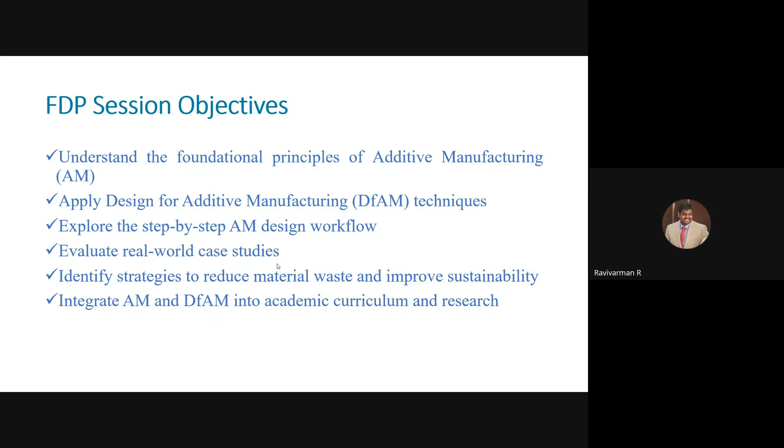Integrating this AM with new design factors, identifying the strategies to reduce material waste and improve sustainability, and integrate additive manufacturing with the design into academic curricula and research. What is the current state now?

As you all have been seeing this topic for the last 4 days, I'm just touching it and then going into the topic. Additive manufacturing, as we know, is the process of creating a three-dimensional part by adding material layer by layer, directly from a digital model.

So in the conventional process, what we do is subtract materials, like milling in the lathe operation or drilling, whereas in additive manufacturing, this material waste has been minimized. So with less resource, we are trying to develop the same materials, which enables us to work with complex geometries and supports the demand for decentralized production.

The major advantage is it helps us achieve quicker production states, with reduced tooling cost and other benefits. So as a comparative thing between additive versus subtractive manufacturing -

in the process flow chart, A and B, we have a solid material, and we subtract the material according to our requirement to bring the required object. The waste generated, the amount or percentage of waste generated, is high in a subtractive manufacturing process. Whereas in additive manufacturing process, the material waste generated is very less, because we are adding layers according to our requirement and the design shape.

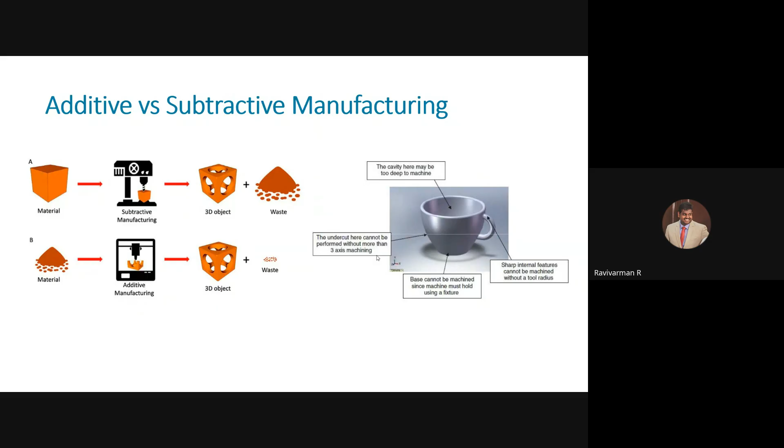So this has to be reduced. Our objective as engineers is always to work towards a better environment with newer processes and technologies. All these processes require special machines, which generate these models stage by stage.

So the process of additive manufacturing, step by step: first we create the design. How we create the design is very important. We can make it as a solid model, and then we provide ribs or extra provisions or support to that model, so that when this file, the CAD file, is given as input to the additive manufacturing process, it is given in the STL file format.

We have to make sure that the design we use helps us reduce material while having proper strength and integrity. Because if we create a solid material without optimal use of material, we end up wasting material, building solid materials that require more material and take more manufacturing time.

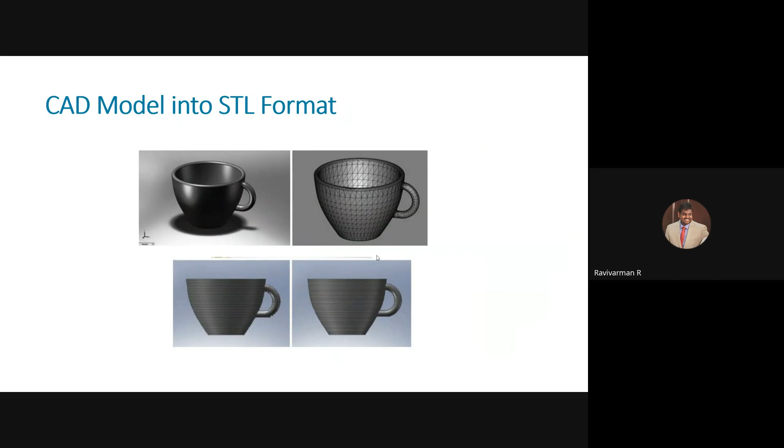So this is a common, simple example shown here so you can relate to it, showing how this CAD model is converted into STL format. You see all these triangular shaped nodes we can develop, and the model is sliced by layer and developed.

Here is a small video about how additive manufacturing works. In the STL format, a triangulated representation of the 3D model is created. This model helps you.

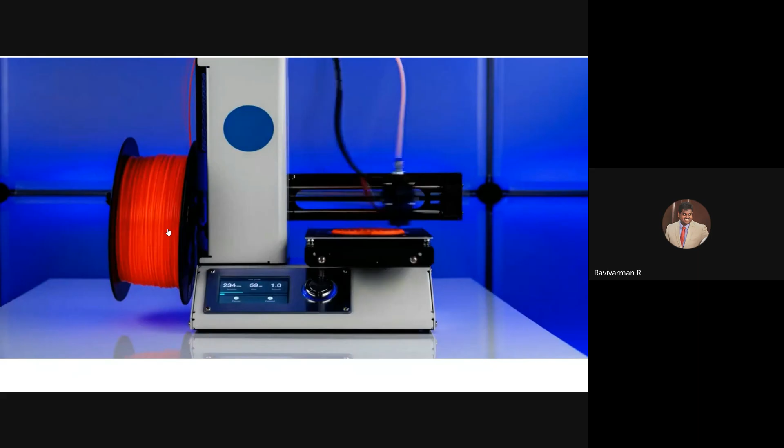The slice parameter, layer, what is the density? After that it is printed. So what is the methodology we use for printing it? We rely on that.

Various materials we can use, like now we have metal additives, and this is being used for implants also.

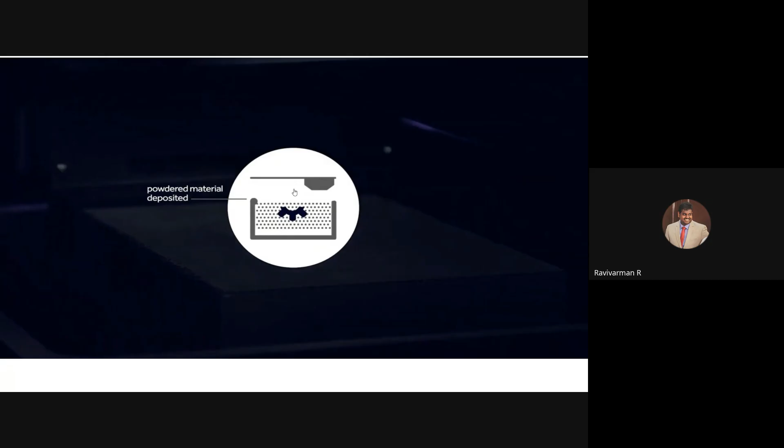Here you can see different operations of how powder material is being deposited. After that, this deposited material is printed using some binders in it, and then the platform is lowered, so that the product is built up stage by stage.

The major advantages here are high productivity. Production is getting increased majorly by reducing material waste and saving energy.

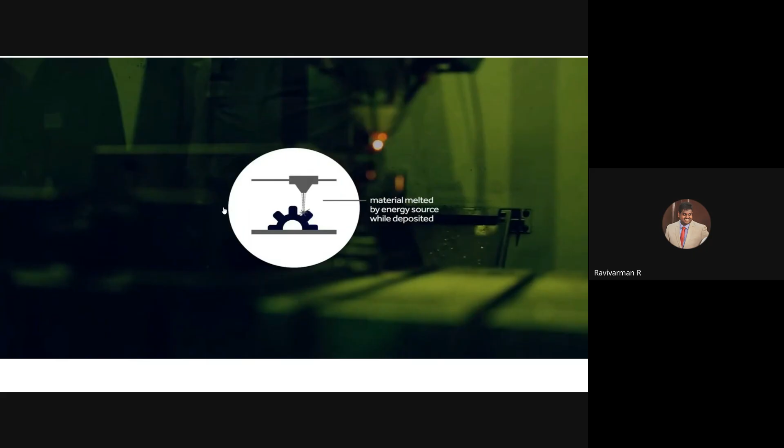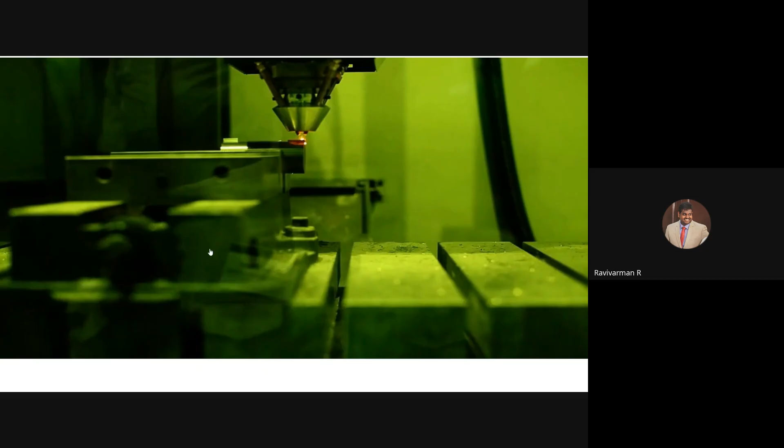This is a picturized view showing a gear, how it is developed using the AM methodology, additive manufacturing methodology. We have lots of types in that; one such type is the material extrusion process.

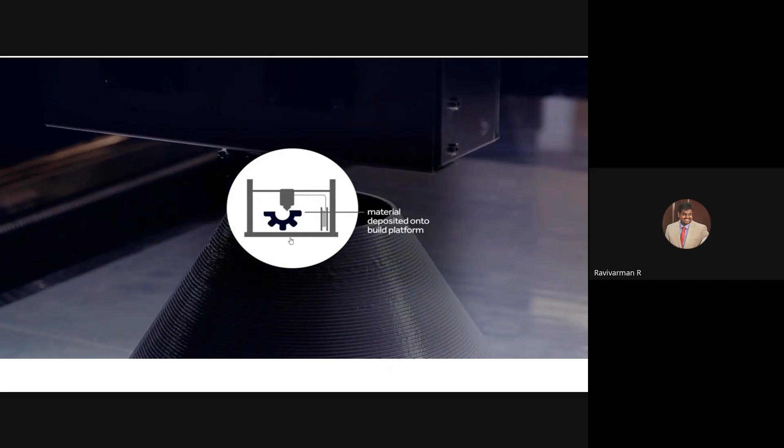So the feedstock can be inexpensive, reduced one.

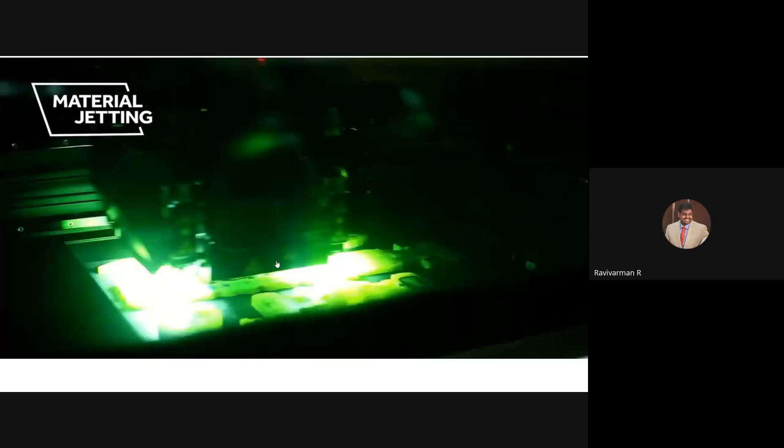Seeing this methodology, why is additive manufacturing becoming important in day-to-day manufacturing processes? Because they are more cost effective, so we have the flexibility in meeting market demands. Nowadays there is a requirement for new products with fewer manufacturing methodologies. So we try to retrieve the shapes and manufacture them more reliably, with a better aesthetic look.

So you can see that additive manufacturing is coming into every field nowadays, from aerospace to human bodies and implants. We can develop a customized product specific to a person, with better sustainability goals and waste reduction, more aligned towards climatic changes, government schemes, and other things.

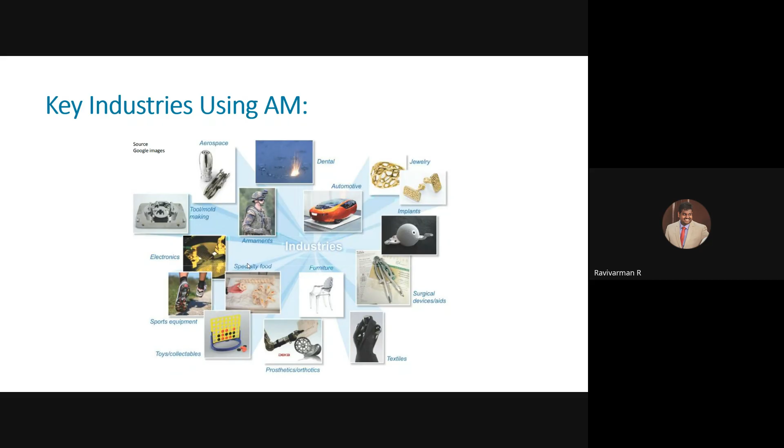So in day-to-day fields like implants, textiles, automotives, and different sectors, we are trying to utilize additive manufacturing, which has been growing largely. The percentage of involvement in producing additive manufactured materials has grown drastically in recent years.

So why additive manufacturing? As we are aware, this is creating a huge impact in the manufacturing process nowadays. How does design play a major role in predicting the performance of additive manufactured products?

In traditional manufacturing, we must consider tool access - how we can utilize the tools used in machining so that the tool can travel into the machining pathways, or in a casting process, how the mold parting lines are differentiated, where we must consider the mold, runner, riser, and all specifications. So we have limited usage of cutter tools and cannot go for different materials.

Then there are casting gates and die constraints, so we cannot produce a component as per our own requirement.

But now, due to design and additive manufacturing, we can develop complex internal structures like lattice structures and honeycomb structures internally, which provide better strength, enable good geometries, and allow customization of material weight. Then there's part consolidation of multiple parts, so we no longer need to redesign again and again.

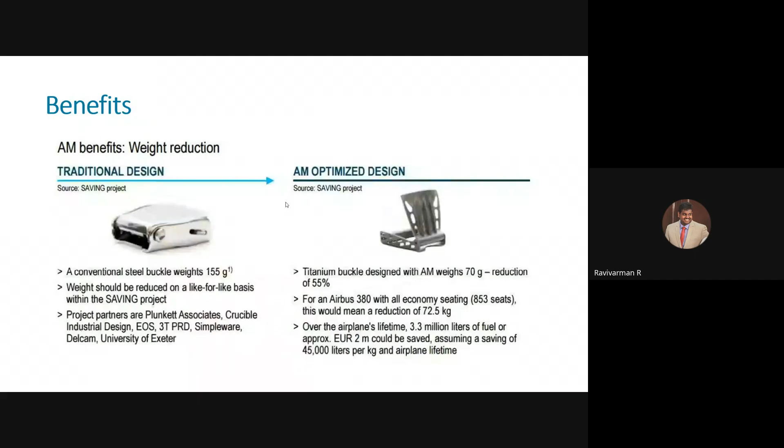So here there are some additional benefits also, like the complexities are very less. This additive manufacturing enables the manufacturing of new geometric shapes that are not possible with conventional methods. With direct conventional methods, you have to take into account the tool making cost - how much I want to rely on making tools. Additive manufacturing makes it possible to design, for example, cooling channels, so that it cools the tool components better. Therefore, we get a reduced cycle time.

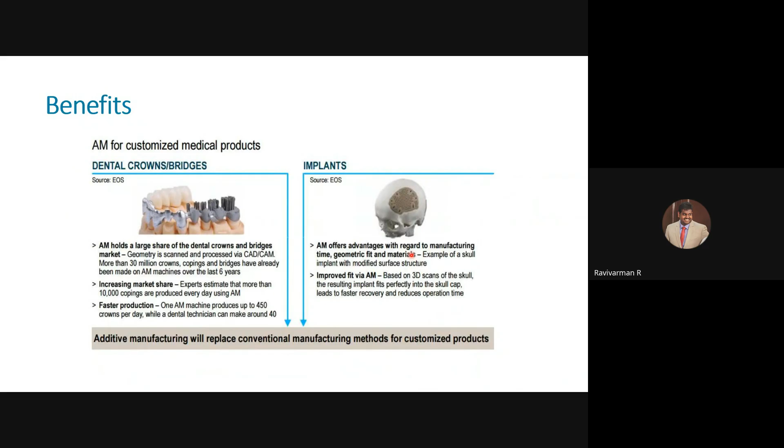So the major benefits of this additive manufacturing for customized medical products - which has been used for a long time in dental implants. We see also large shares in dental crowns and bridges markets, where the geometry is scanned and then processed through CAD CAM software. So we can create the exact requirement of the shape, thereby the market share has been increasing in fast production. This also provides advantages with regard to manufacturing time, geometry, fit, and materials, where skull implants - a particular implant for a particular human - has to be created. So this additive manufacturing plays a vital role.

So in future, if we are planning ahead, now we have been provided with normal printers - how printers have been used. Like that, in future we may be having a home 3D printer, where we develop our requirements on a need basis.

Accordingly we can recycle the old material, so that we can improve and input our personalized data, so that we can create it. Nowadays you can see that cell phone covers also have personalized things printed on them, so this has been developed.

Now we come into the design for additive manufacturing. This is very important to take into consideration before you process or develop the product, such as topology optimization, lattice structuring, part consolidation to improve function, reduce material usage, and minimize supports during the process. All this has to be applied during the design for that particular component produced through additive manufacturing.

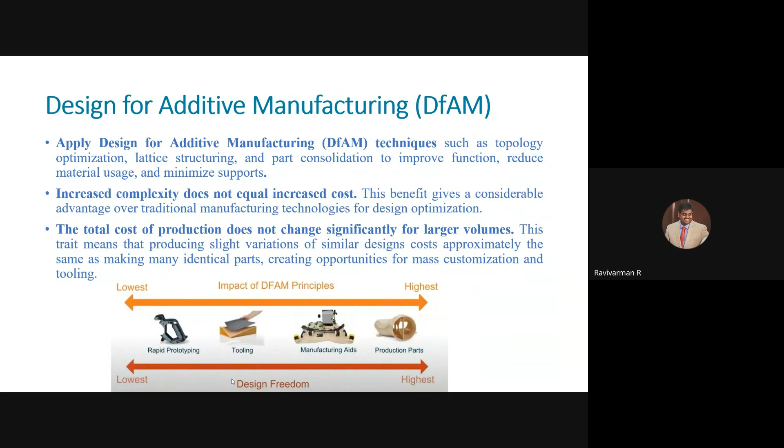Bringing additive manufacturing into the conventional process, or replacing the conventional process with additive manufacturing - the impact of design for additive manufacturing on tooling and production parts, rapid prototyping is high, and we have a lot of design freedom in that. We have to follow some principles. For this design for additive manufacturing, there are 7 principles listed out here.

Think additively - we should always be thinking like adding materials, not subtracting materials. We have to think about the design for orientation, how contours are designed by integrating the surface, the segments, and bond parts development, and adding hardware features to the system, like making provisions for inserting screws. Standard things we have to add into it - minimize complications in the design, and consider critical surface treatment. We'll be seeing each one by one.

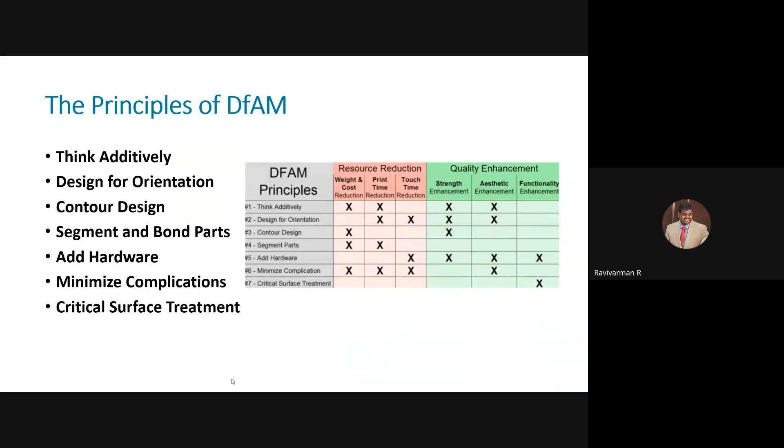Here a table has been shown, which tells you the resource reduction and quality enhancement with regard to weight, cost, print time, strength, aesthetic, and functionality. You see how these processes help reduce weight and cost, printing time and touch time - that is reduction time in production - the enhancement in strength, look enhancement, and functionality enhancement. So the first step is think additively.

So what we have to do is reduce the material in between the solid areas, so that we can provide some ribs or fillets to reduce the stress concentration points, which enables you to create a safer component which doesn't fail, adding additional strength without adding tooling cost.

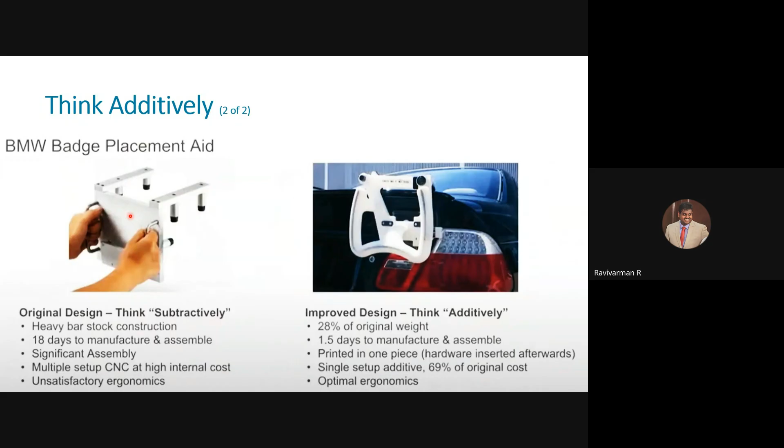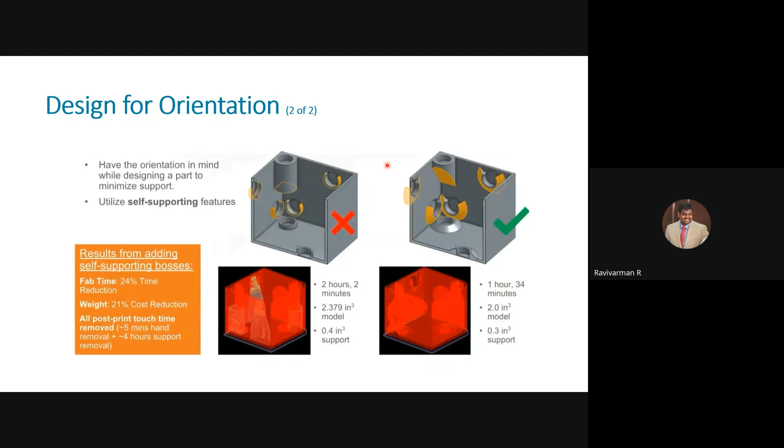So the next one is how I'm going to segment it and bond the parts. Here you see there are two 3D printed blocks, A, B, C, D. The images show that the blocks are of different segments and bonded together. The first, A section, is separated like an I section. Second is a pi section, third is an S section, and fourth is a V section where the interlocking has been provided.

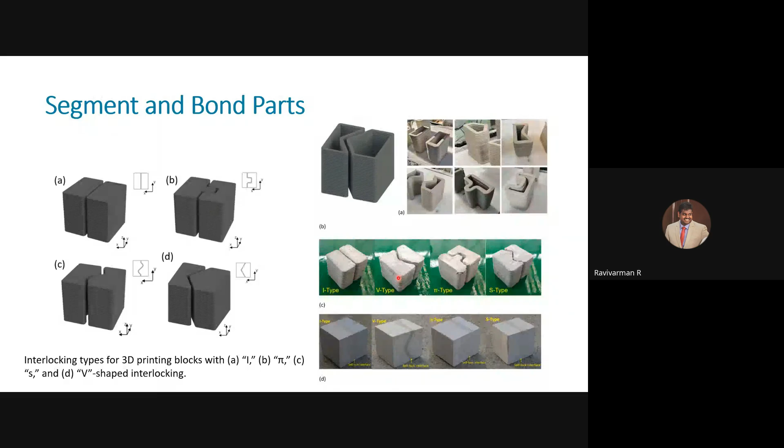The study conducted explains which interlocking requires or has better strength during compression testing. They suggest it depends upon the design you consider, what type of profiles you take, and how much load is applied. S shape and V shapes provide better integrity, so these segments have better strength when assembled together.

Then addition of hardware, like addition of bushings where hot or abrasive materials will touch others. Then you provide tapping holes where internal threads, bolts, have to be fixed or screwed into the component. This additive manufacturing design has to also include where it stops and how they get integrated into it. So touch points, or where you add magnet rods or fixture points, has to be decided through this AM process, through the design process itself.

Minimize complications. Here you see unnecessarily don't add complicated shapes. Additive manufacturing is the process that will help you get the product in the desired shape as you are thinking, but try to avoid unnecessary things.

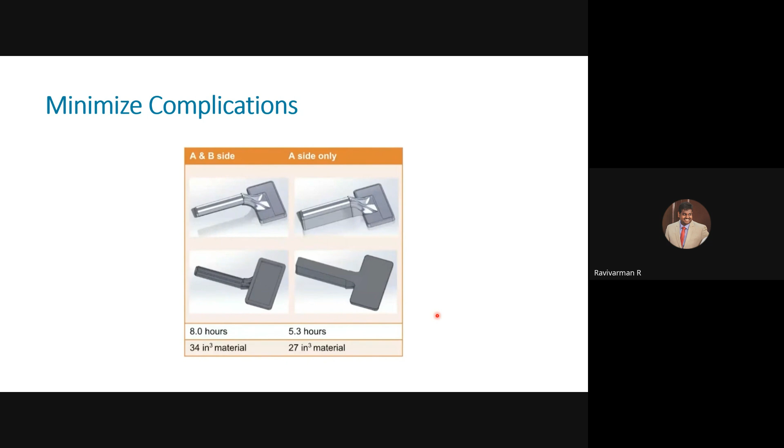Here you see both the A and B sides are shown. In the B side they have some special extruded things present in it. If it is required, the approximate time for creating it was 8 hours, and the material volume is also shown. When you reduce this, almost 30 to 40% of the time has been reduced, so you get a lesser volume of material in a reduced time. These complications have to be avoided before going for the design, avoided at the design stage before going for the process.

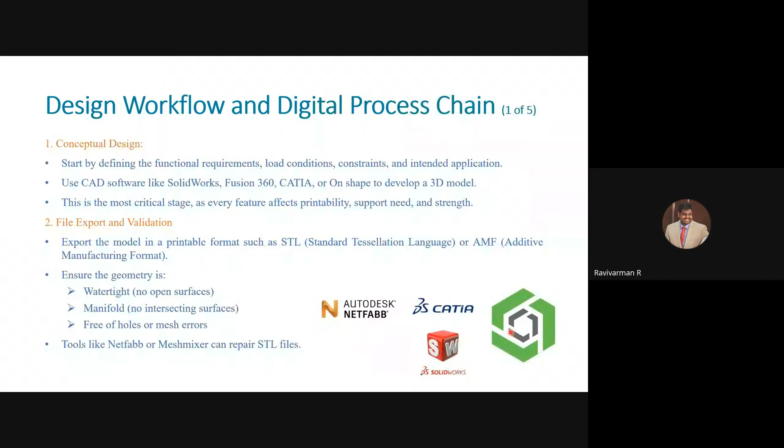The third process is the slicing and tool path generation, in which way our tool will travel so that the product is created. Import the STL into slicer software such as Ultimaker Cura or PrusaSlicer or Simplify3D.

The key settings in the slicing process include the layer height resolution, the infill density and pattern, whether it is honeycomb or grid structures, the support structure where supports are required, and the print orientation, which direction, and where I'm going to add layers which doesn't affect the surface finish and strength of the product.

After which the output, the G-code, will be created, which guides the printer. Here you see models and 2D geometries and the tool paths shown, how the tool will be traveling, which helps to create the part.

You should be aware that we are using an optimized tool path, so the tool moves a lesser distance, so that I can generate the required product in a quicker amount of time.

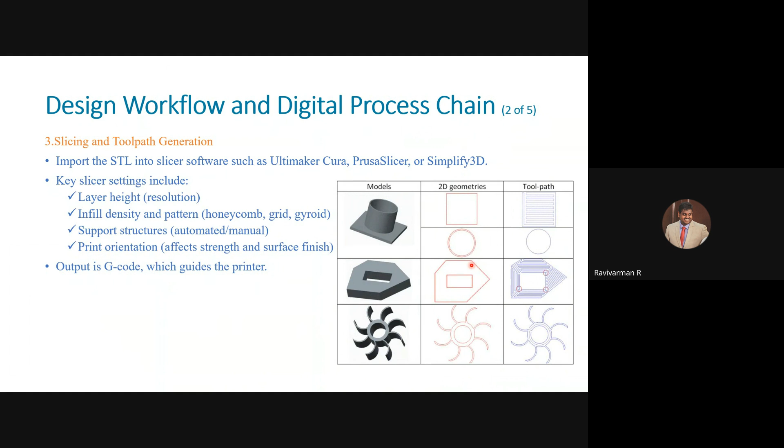So the material and machine setup, other sessions might have covered this. Choose the material based on the part performance and the printer type, FDM, SLM, SLS and DMLS, direct metal laser sintering. I'm not going deep into the materials.

After which, the setup involves loading the filament or the powder, then calibrating the print bed platform, and verifying the nozzle or laser alignments. All things have to be taken into consideration.

Then the process flow, printing and fabrication. It depends on the process and technology you are going to use, where the printer will build up the layers one by one. After that, you will get the product which has been fabricated.

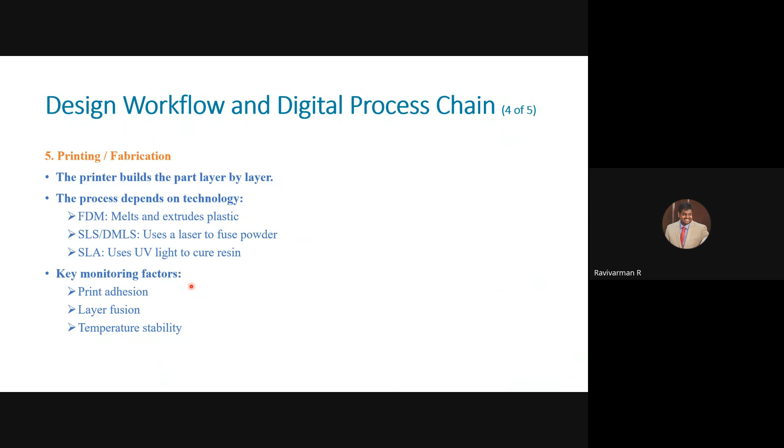Here you have to monitor basic factors like print adhesion, better bonding, layer fusion, and the stability of the temperature.

Post which you will do the post-processing operations, like removing any supports you have added - manual, water soluble, or breakaway supports - surface finish like polishing or vapor smoothing, heat treatment for metal additive manufacturing, and then curing for resin prints.

Finally you will do the inspection and validation, using CMM machines, calipers, functional tests, and revise the design based on the requirements, and then begin the iterative loop.

So this is the design workflow and the digital process chain. Now we come into functional design replacement, that is how industries are using this additive manufacturing in a better way.

This plays a significant role in industrial practice, particularly in enabling the functional replacement of parts and components. This technology offers a wide range of possibilities and advantages compared to traditional methods, in the context of spare parts and legacy component management.

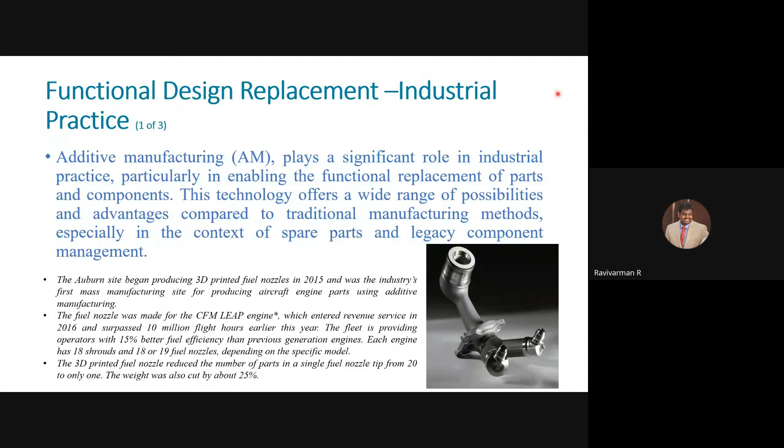This is how additive manufacturing in industry is helping a lot. It gives design freedom and part consolidation, combining multiple parts into a single functional part, reducing assembly time and failure points. It enables customization and mass customization, helping mass production. Rapid iteration and optimization lets you change designs quickly without worrying about tool inventories.

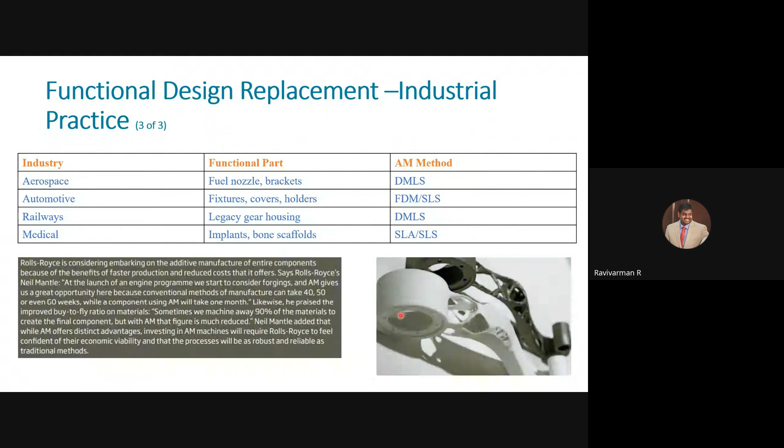Rolls-Royce company, everyone will be knowing about it, such a high-valued brand in cars. They became a major beneficiary of additive manufacturing components by getting faster production. You know a very limited number of Rolls-Royce cars is manufactured every year. There was an engine launch program where a Rolls-Royce company official said that AM gives them a good opportunity.

These methods are replacing conventional ones in industries, but our objective should not be only that replacement. We should also think about sustainable design practices and material efficiency. Sustainable design prioritizes minimizing environmental impact and resource consumption at every stage of a product life cycle, from material extraction and manufacturing to usage and end of life. You should always think about reduce, reuse, and recycle—designed to minimize material use, allow for reuse, and facilitate recycling.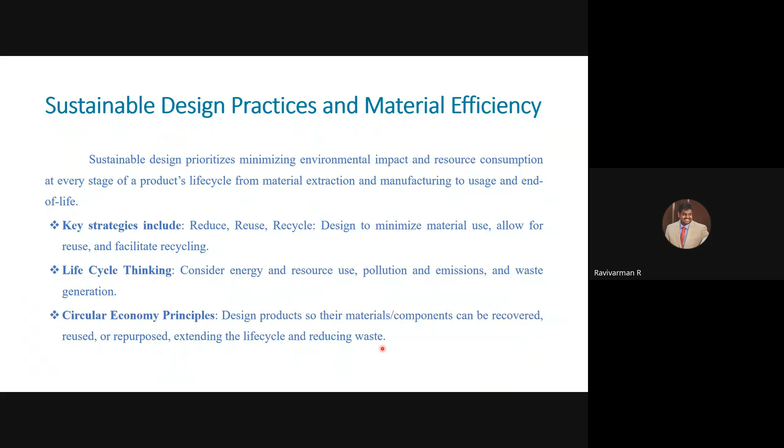Here we use materials more efficiently, achieving the same function with lesser raw materials, that is lightweight design. By using better topology optimization and advanced modeling, with AI and ML brought into the design, we can minimize loss of strength or utility, so that the components have the same strength but with lesser weight.

Durable designs focus on how we create parts so they can be easily replaced, repaired, or upgraded. Eco design is one of the factors where environmental impact and support should be considered across all industries.

Here we have the best practices which are followed. You see additive manufacturing, ecological sustainability, and design—creating an eco design for additive manufacturing. It is directly proportional to the maximization of design benefits with additive manufacturing and minimization of environmental impacts. The higher this minimization of environmental impact, the more benefit there will be.

Sustainable material selection involves a preference for renewable and recycled materials, along with process optimization and waste reduction.

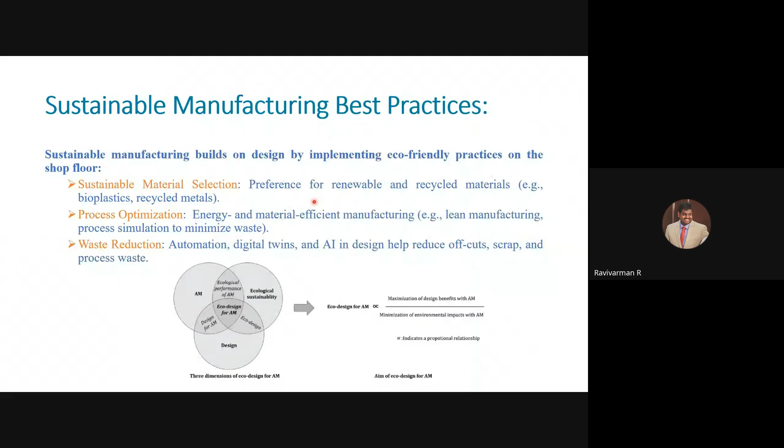Now let's discuss the industry drivers for sustainability in additive manufacturing: environmental regulations, resource optimization, and industrial collaborations.

Here you see the environmental regulations used for sustainability in additive manufacturing. Industries face increasing regulations for cutting greenhouse gas emissions, promoting circularity, and ensuring transparency through ESG—environmental, social, and governance reporting.

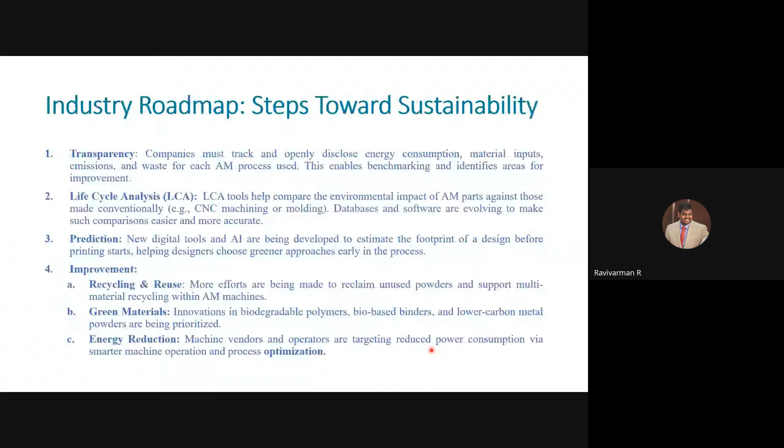The government is trying to create a curriculum, so they are updating engineering colleges to add more curricula to teach additive manufacturing fundamentals alongside eco design, life cycle thinking and circular economy, which is being emphasized by AICTE or other board of studies in individual universities, to bring it into the undergraduate curriculum and give research leads to the students.

So they find common labs in academic institutions by advancing the same recycling and design and other things, bringing the sustainability concept in at the college stage itself.

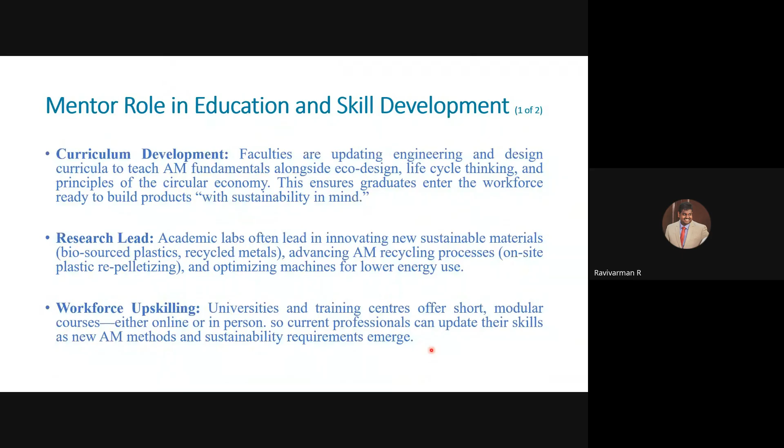So upskilling the workforce, they are trying to make training centers, and the government has also added this under Industry 5.0, which is one of the important things here. Additive manufacturing is taken into consideration. So they are funding collaborative project works, creating knowledge hubs, and making advisories which contribute more to sustainability startups and established firms on implementing best practices for sustainable production.

So here, sustainable design principles. One is eco design additive manufacturing, incorporating sustainability into this process to enhance recyclability. Nowadays we use more of these polymers, biodegradable polymers, natural fibers to create sustainable composites. I think that is also one of the topics going to be covered in this session. I don't know whether it is completed or not, so it will be covered if not completed.

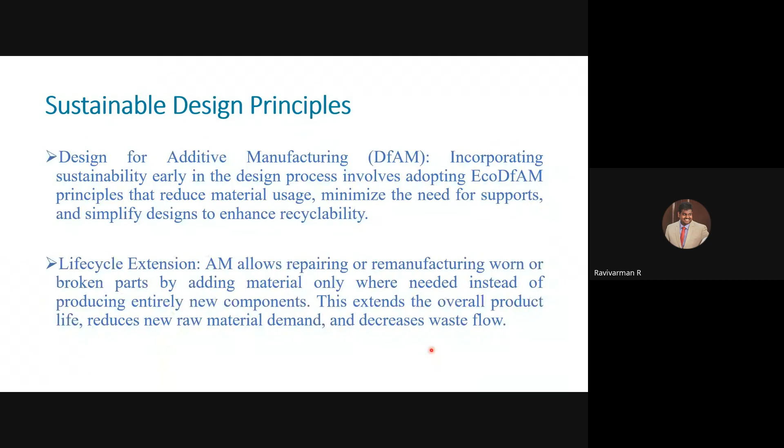So life cycle extension, how we are distributing and localizing production. Manufacturing parts near the point of use drastically lowers transportation distance, cutting associated emissions, so more access is created.

So production on demand means companies avoid overproduction, reducing inventories. This provides a better approach, particularly beneficial for customized small batch production and decentralized manufacturing.

So the best practices here are conducting LCAs to quantify comparative environmental impacts and identify improvement areas, how to improve by identifying the life cycle assessments. Leveraging AI and digital twin technologies to optimize processes, detect defects early, so that the model is sustainable, bringing impacts in real time, collaborating across the supply chain, and ensuring personnel are trained in circular economy.

So nowadays you see that when you want to create something, every institute or lab, wherever you create a product through additive manufacturing, you contact some suppliers. They are reliable or comfortable with 5 or 6 maximum materials, so in metal additive manufacturing, if you take, they are comfortable with 2 or 3 materials like some alloys or titanium.

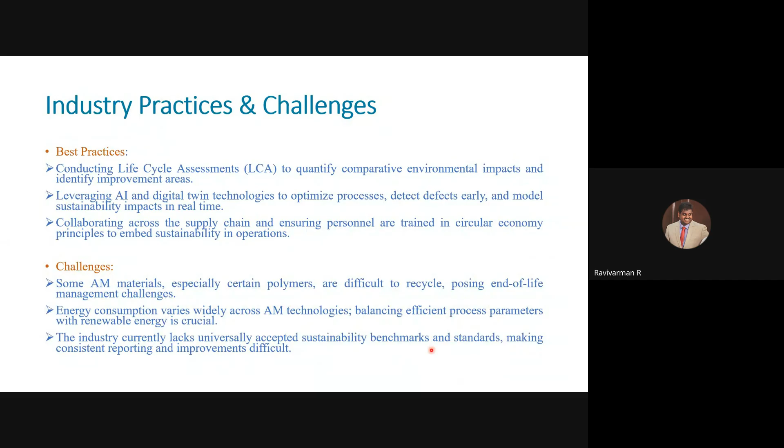This has to be increased, so the government is also planning to increase it, trying to bring more materials into it. But there are more challenges. Certain polymers are difficult to recycle, so they are working towards more recyclable polymers, balancing efficient process parameters with renewable energy. The industry currently lacks universally accepted sustainability benchmarks, so standards have been developed, but making consistent reporting and improvements has become difficult.

The life cycle analysis has to be evaluated so that this additive manufacturing process is more efficient, having both environmental and economic implications. The technological features of additive manufacturing have both positive and negative impacts. From an environmental perspective, it enables the creation of lightweight designs and complex geometries.

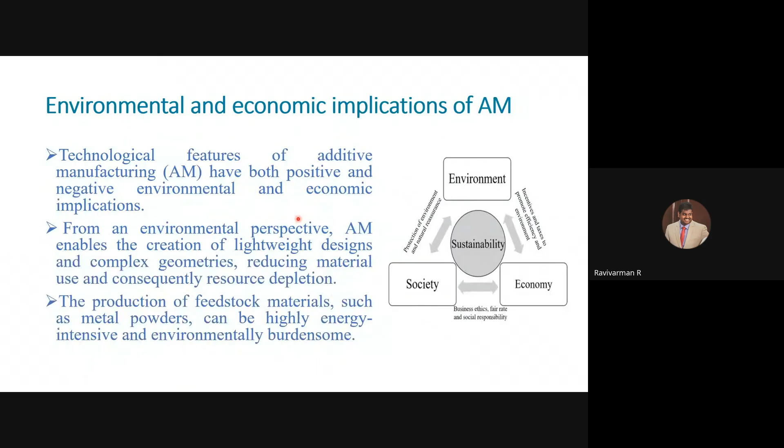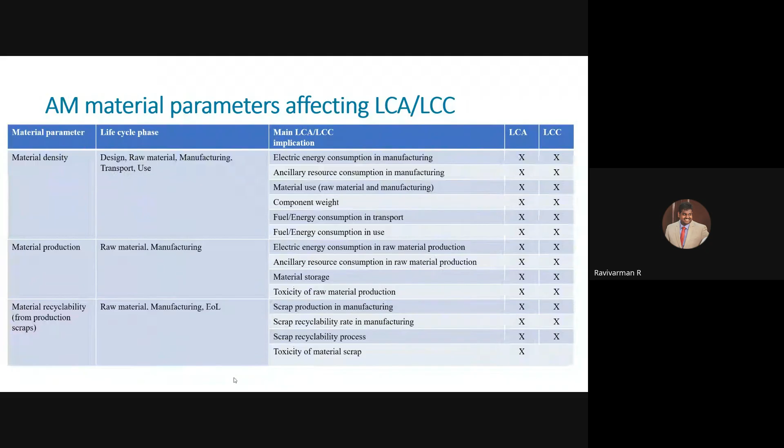Based on that, the metal additive life cycle assessment has been modified during the manufacturing process - how it has been automated and transported in metal additive manufacturing technology, how we are reusing and redesigning it, and powder recycling, so the process is being modified at this stage. You have to think about this sustainable goal, using reused or recycled materials so we can move towards government norms and create better sustainability with better economic and environmental outcomes.

There are a few case studies which we are working on here at NIT Agartala. We work under gears - you see that gears are ideal components to demonstrate how additive manufacturing design potential helps. So we have these 3D printed gears, which are having low load applications, where the load applied will be less.

So you can go for a metal additive, but due to cost effectiveness, we are not taking it. So we can create a custom module teeth count tailored to the application, and also integrate lubrication paths or mounting features directly into the gear body.

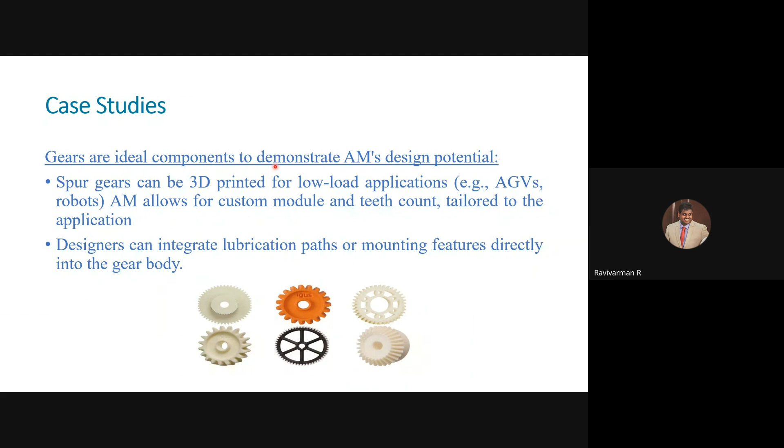In our research, we have worked on developing some modifications in the gear tooth profiles, where we are trying to bring non-standard tooth profiles so that we can improve the load carrying capacity by creating different tooth profiles at the design stage.

Creating this helped us achieve better bending strength and contact strength in the design stage, which has been evaluated through finite element analysis by creating some non-standard or asymmetric spur gear profiles.

Here you see that the coast side and the drive side are having different profiles in the asymmetric gear tooth, or we have this internal asymmetric gear tooth or non-circular gears.

So all these types of gears have manufacturing difficulties. To manufacture these things, I need to manufacture the tool, the cutter, then think about machining it. Proper things have to be done, but AM helped us a lot in developing these things.

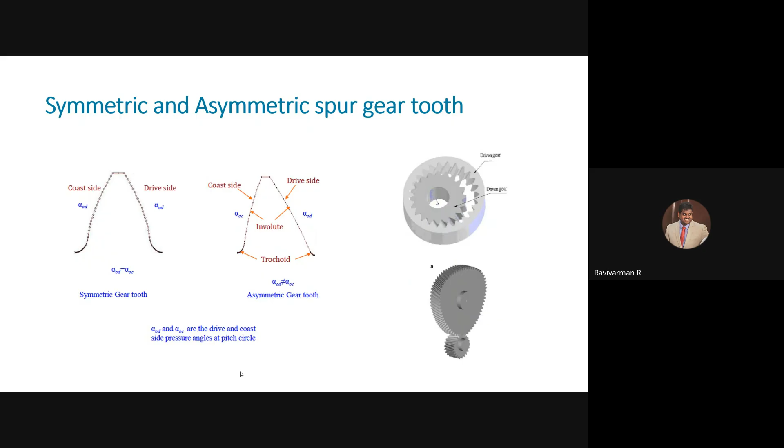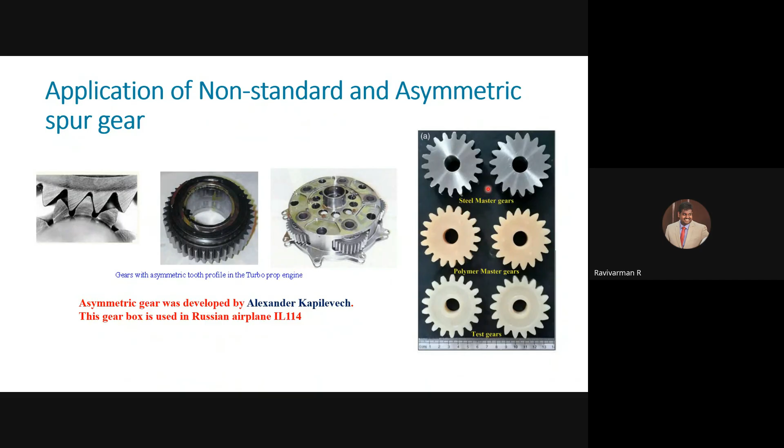These asymmetric profiles are used in turboprop engines, which was developed by Alexander and used in Russian aeroplanes. So here we have developed this metal asymmetric, polymer asymmetric, and these gears.

So there is a lot we find that research can be done in this particular area, in which our team has been working on studying this additive manufactured non-standard gears and non-circular gears.

By this 3D process, in whichever direction we are manufacturing it, we can check the crack flow. Similarly, we can check the bending strength and performance parameters of these gears.

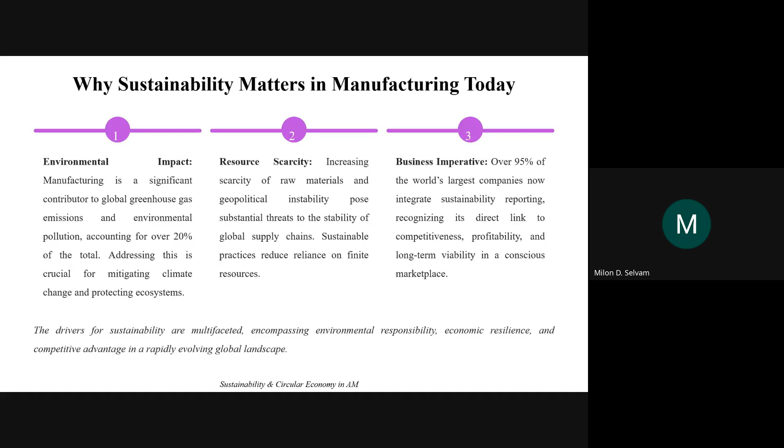Sustainability is multifaceted, and it is a need of the hour in engineering, especially in manufacturing, in all types of engineering. That is what we are going to see.

So what is additive manufacturing or 3D printing? I think this is the 5th day you all are attending the FDP, and many resource lecturers have given enough input about additive manufacturing. I don't want to repeat the same. So it's a layer by layer digital design that can be printed, and any complicated or intricate shapes can be easily produced. So additive manufacturing - a game changer for sustainability.

So there is a question, how it is a game changer. Let us get clear about this AM - it is unlike subtractive manufacturing, that is traditional manufacturing methods where we cut away the material, which obviously becomes scrap or raw material waste. For an example, so why it is a game changer?

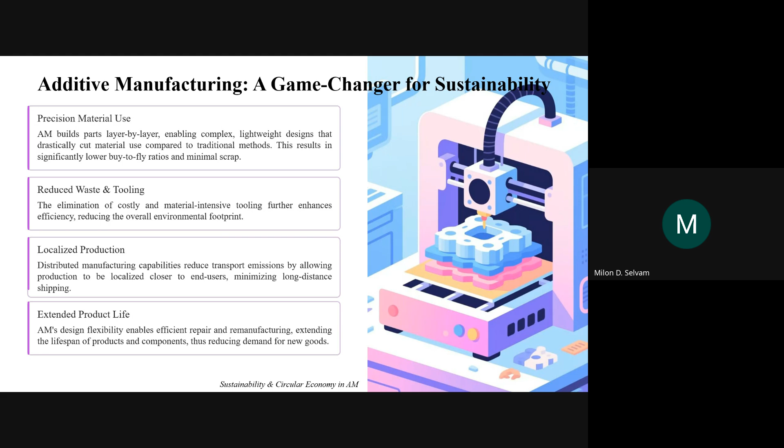A stat shows 2.1 billion tons of waste produced in European Union, highlighting the immense scale of materials discarded. 2.1 billion tons of waste -- it is a very big quantity.

Another linked stat: 190 kilogram of packaging waste per person per year in EU, a significant contributor to overall waste streams. Then 14.9 tons of raw materials consumed per capita in Europe, European Union, in 2022.

That is another stat. See the current linear model -- I'm going to show you what is a linear model and what is a circular model. The current linear economic model leads to unsustainable levels of waste generation and raw material consumption. Finite supplies and increasing import dependencies create significant economic and environmental vulnerabilities for manufacturing sectors worldwide.

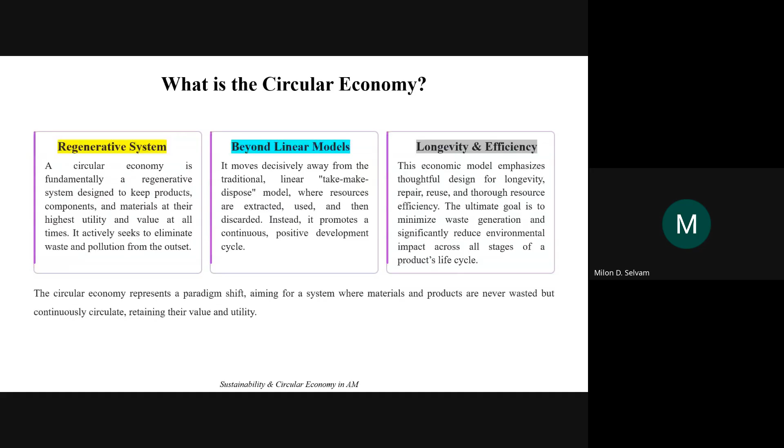So, linear economy and circular economy. Linear economy leads to a certain step. So are we all together? Can anyone ensure?

Hello? Hello? Yes, sir. Yes, sir. Yes, sir. Okay, thank you so much.

Linear economy: extraction of natural resources, and finally after design, production, distribution, consumption, and disposal, it is going to waste. We have seen that 2.1 billion tons in EU.

Just imagine when that data is accounted for the Asian continent, our own country, and even China -- highly populated countries as per stat, with most Asian countries leading in population. Assume the consumption of the product and even the disposal, final waste -- it is a big figure of waste annually produced.

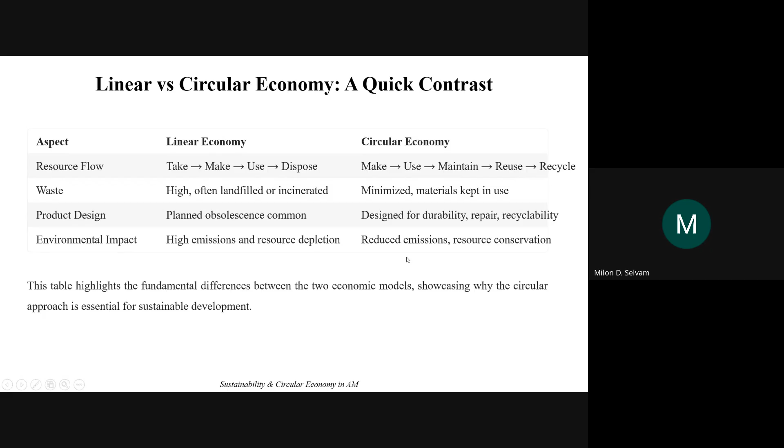So product design - planned obsolescence is common, but in circular economy, it's designed for durability, repair, and recyclability. So environmental impact as well, as we discussed.

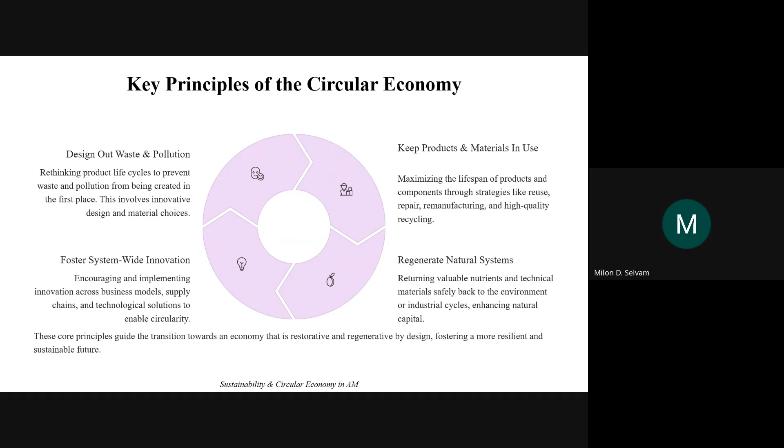So the key principles of CE, circular economy, are: keep products and materials in use, regenerate natural systems, design out waste and pollution, foster system-wide innovation. So there is a wide scope for research - for those who are budding researchers, there is a wide scope in circular economy.

I don't know how factual it is, right? How factual, and how far are we actually using that? Because practically speaking, we have to see the software and even the versions of electronic goods we are using now - smartphones, computers, and so on. That is a different matter.

So what the schema says is this electronics example can be replaced by other terms - automotive products, or even the synthetic oil used in manufacturing. So this is what a closed loop system is - promoting recyclability and reusability.

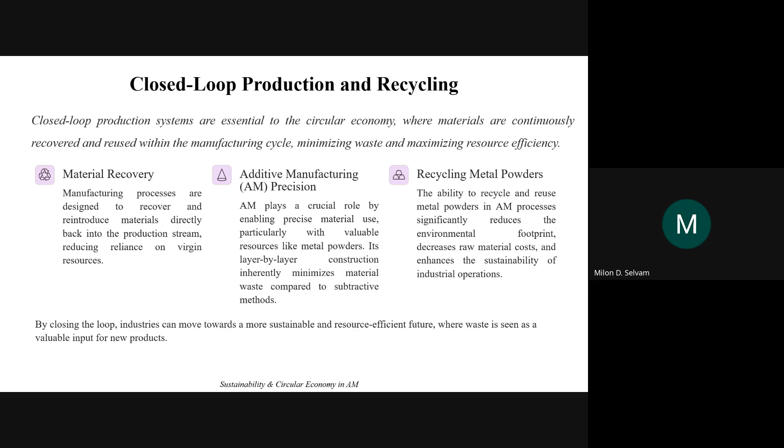So in closed loop production and recycling, there will be a provision for material recovery. And in additive manufacturing, recycling the metal powders. So closed loop productions are essential to CE, where materials are continuously recovered and reused within the manufacturing cycle, ensuring minimization of waste and maximizing resource efficiency.

So circular economy benefits for manufacturing: supply chain resilience, economic growth, as well as jobs especially in the recycling processes. Then emission reduction to save environmental impacts. Then innovation catalyst - innovation.

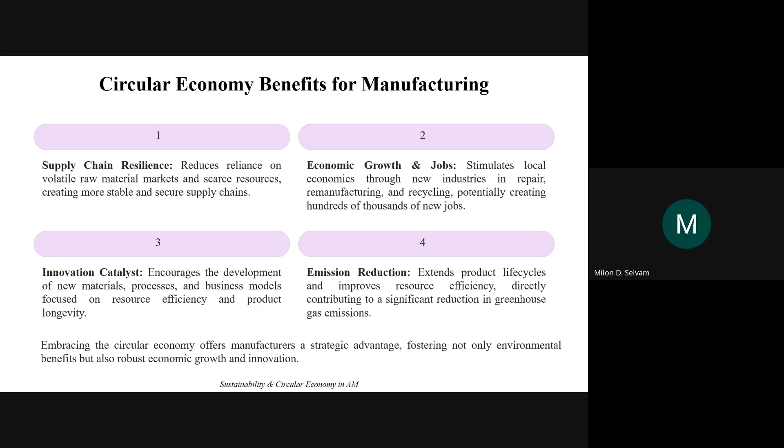So we engineers are tasked, or intended, for research and innovation, obviously. If there is no innovation and research, obviously the country will face serious trouble even after 5 years, or even a decade, in 10 years. So there is a bigger chance of innovation and research in circular economy.

So, coming to the topic: how AM, that is additive manufacturing, supports circular economy in manufacturing.

So, sustainable feedstocks - there is a growing trend for additive manufacturing to utilize... Dr. Rajshekharan, hello?

Yes sir, yes - so can you advise someone to mute their mic? Yes sir, yes sir, I have done it. Thank you so much, now you can continue.

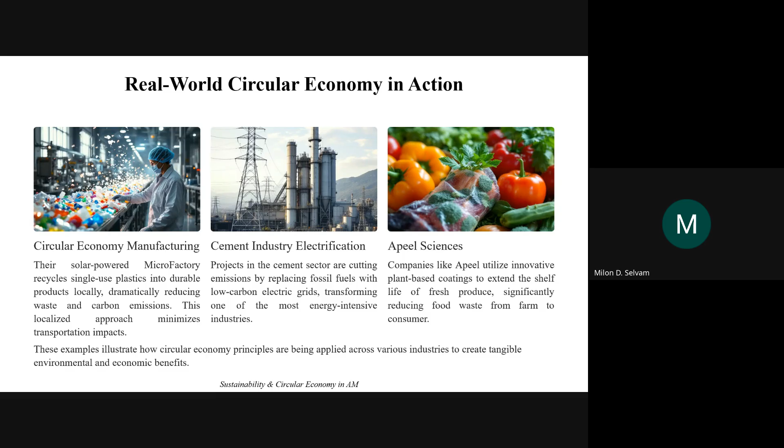So some real world CE, circular economy, in action - that is okay, that is a general aspect. Let us go to the business - some examples, in the interest of time.

So, benefits of CE in additive manufacturing. Another two aspects: material savings and economic opportunity. We have already discussed that.

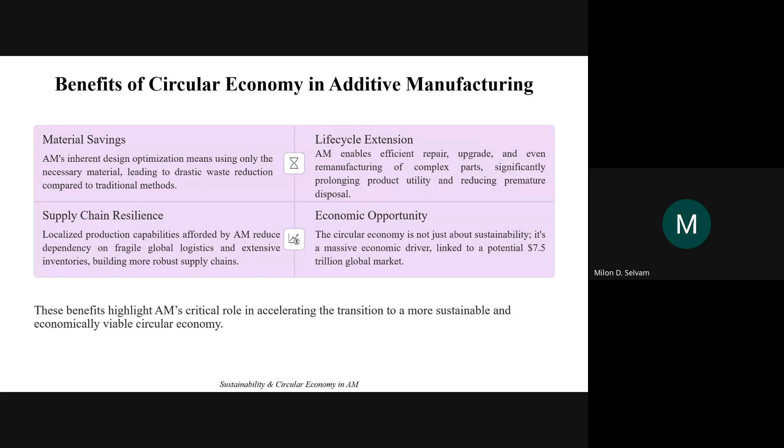Then the next aspect is supply chain. Localized production capabilities afforded by AM can reduce dependency on fragile global logistics and extensive inventories, building more robust supply chains.

Then a case—circular economy in additive manufacturing. See, an Italian startup called F3nice. F3nice is a company started in 2020, if I am not wrong. It is a pioneering example of circular economy principles applied directly to additive manufacturing, especially. They specialize in producing high quality additive manufacturing metal powders, but with a critical difference.

Their powders are derived from 100% recycled scrap metal, that's how they claim. It's a very big initiative this Italian startup has recently initiated. The company has successfully raised $120,000 in pre-seed funding, demonstrating investor confidence in their sustainability. It's not small money—$120,000 is almost a crore in Indian rupees. That demonstrates investor confidence in the sustainable approach and potential for scalability in this green powder production. This company utilizes a patent-pending process that transforms what would otherwise be industrial waste, such as decommissioned valves and outdated metal parts, into a valuable high-grade powder feedstock for 3D printing. It's a great initiative, and this innovative approach fundamentally disrupts traditional raw material mining and processing, proving that circular principles are not just environmentally responsible but also commercially viable and technologically advanced.

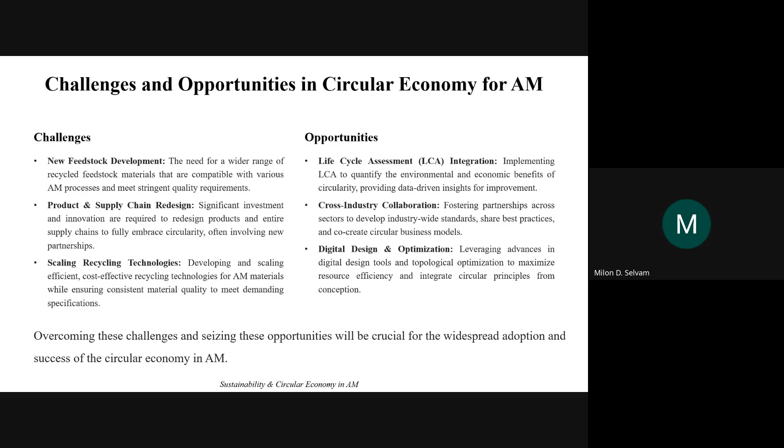Thank you. So, future directions we shall see in the next slide and the coming slides—sustainability in additive manufacturing.

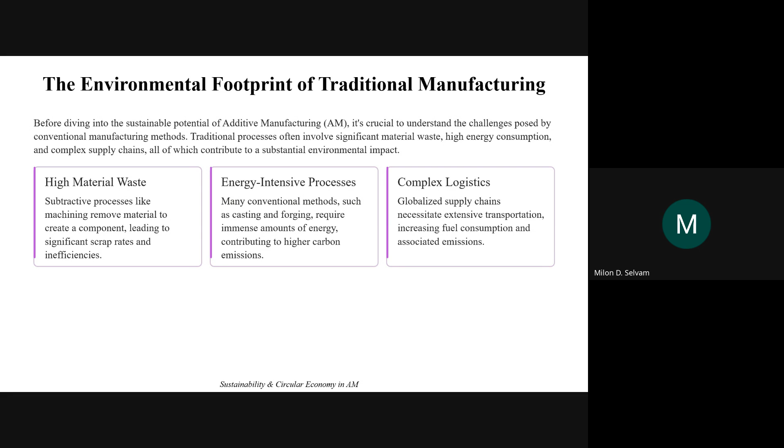Then the environmental footprint of traditional manufacturing, traditional subtractive manufacturing. Before diving into the sustainable potential of AM, it is crucial to understand the challenges posed by conventional methods. Traditional methods often involve significant material wastage, high energy consumption processes, and complex supply chains, all of which contribute to a substantial, significant environmental impact.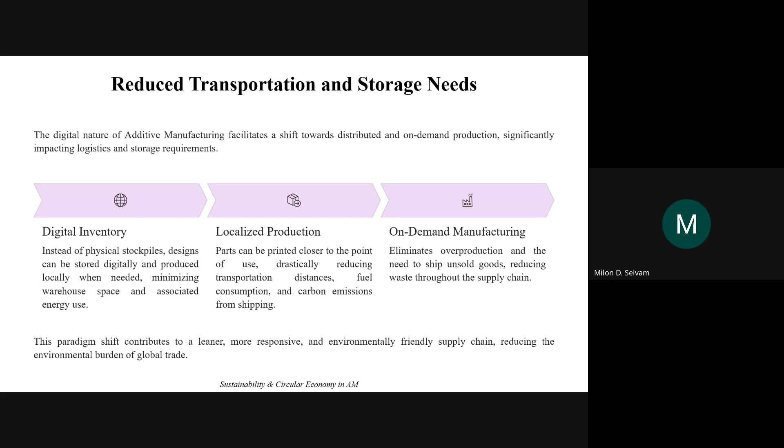Then the impact is that even a small weight reduction in aircraft parts translates to substantial fuel savings over the lifespan. We all know well, fuel is a natural resource extracted as a mineral. Obviously it is raw material extraction. Petroleum is a raw material extraction, and if we continuously extract it, there won't be any fossil fuels left. There should be some alternative found.

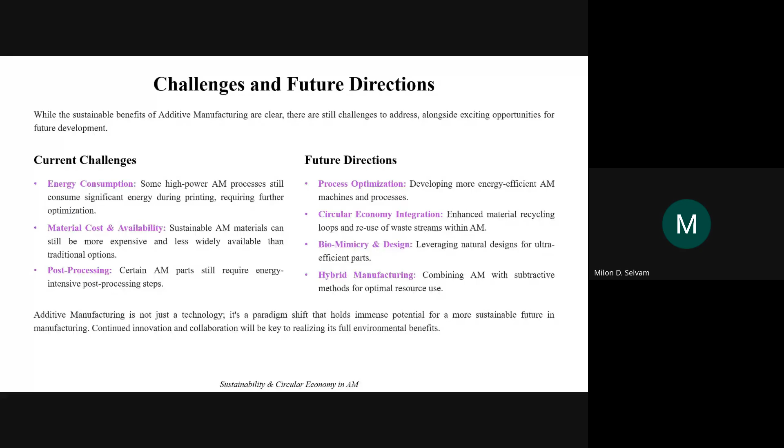Likewise, in aerospace, the transportation sector, that is automotive in manufacturing, also benefits from additive manufacturing, with so many advantages like reduction of material waste, reduction of high energy consumption, fuel efficiency by reducing pollution emissions, etc.

Let me skip this slide since we have seen it. Lightweighting automotive components, as I said.

The stages in the AM process: first, initial design and analysis. Engineers redesign the bracket using topology optimization software, identifying areas where material could be removed without compromising structural integrity.

Then proper material selection - how material is selected, such as recycled aluminum alloy powder, suitable for the PBF process, ensuring both strength and circularity. The third stage is 3D printing.

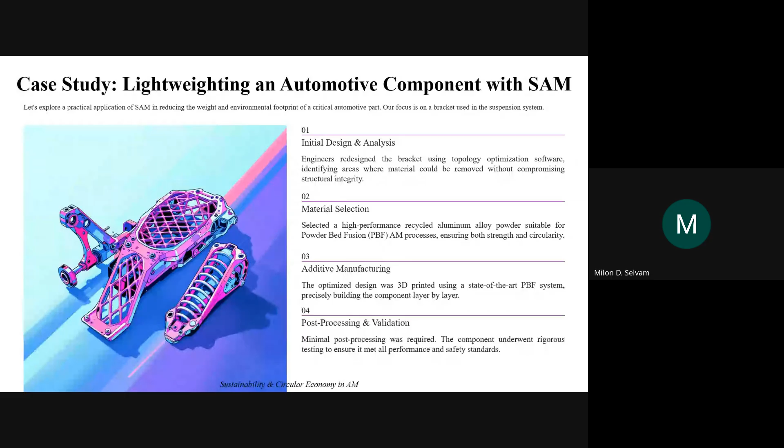It's the AM process, and the final stage is post-processing and validation. Minimal post-processing was required. The component underwent rigorous testing to ensure it met all performance and safety standards - an additively manufactured bracket for automotive application.

It takes us towards the circularity or circular manufacturing model, what you can say towards a sustainable engineering model.

So beyond the bracket, the broad impact of sustainable additive manufacturing - this is also a repetition of whatever we have discussed. I don't want to repeat the same, let me skip that.

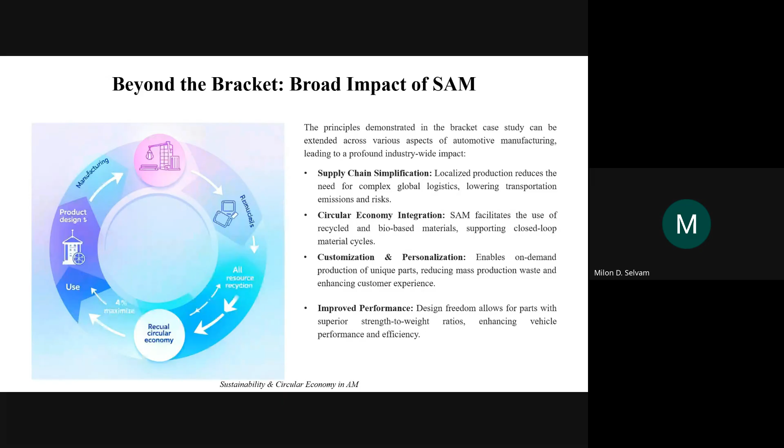A shortage of engineers and technicians skilled in AM design, operation, and processing needs to be addressed. That is a gap denoted for us, for our future considerations to be skilled and research in that area.

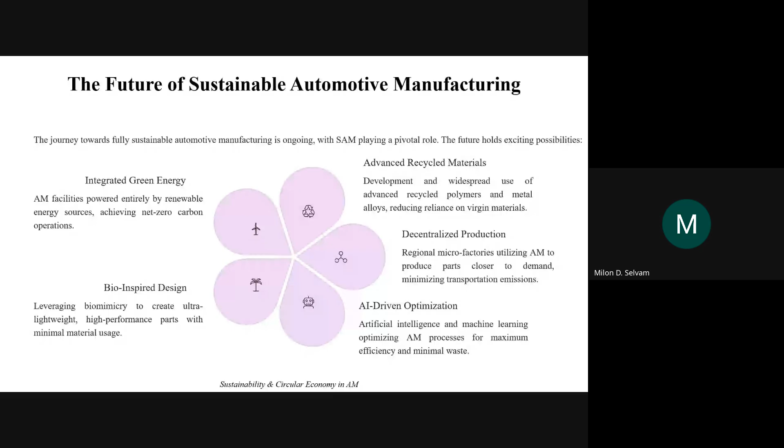Then the future of SAM, sustainable additive manufacturing: integrated green energy, then bio-inspired design - leveraging biomimicry, another research area for budding researchers to create ultra lightweight and high performance parts with minimal material wastage. Then advanced recycled materials, decentralized production, and AI driven optimization, artificial intelligence integration.

So challenges and opportunities, maybe we shall see as a summary - technical challenges.

The journey of circular additive manufacturing faces significant technical roadblocks. There, as engineers, we need to address or work on that area - technical roadblocks for the future manufacturing sectors. One primary concern is the development of repurposable and recyclable materials that maintain high performance.

The material has to give high performance as well, and the current feedstock often lacks the durability and reusability required for closed loop systems, leading to downcycling or wastage. Moreover, process efficiency and energy consumption remain critical areas.

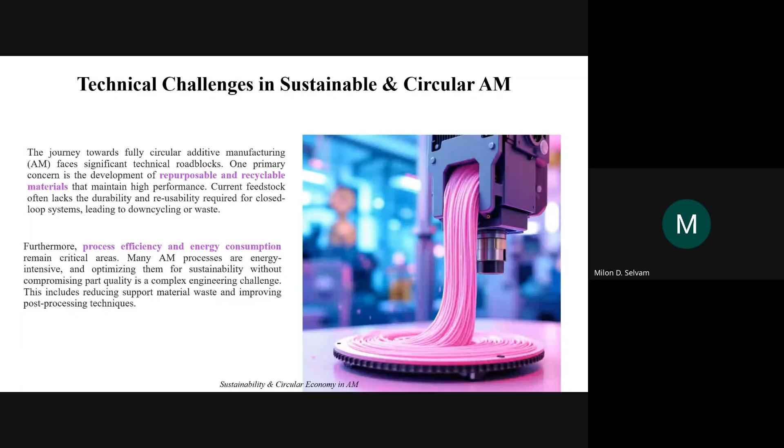Many AM processes are energy intensive, and optimizing them for sustainability without compromising part quality is a complex engineering challenge. This includes reducing support material waste and improving post-processing techniques.

A pathway to overcome those technical hurdles is advanced material science - developing new polymers, metals, and composites that are inherently recyclable or biodegradable without sacrificing key mechanical properties and printability, targeted to give high performance.

Focus should be on bio-based and waste-derived feedstocks - that is how our topic, circular economy, comes in. Focus on bio-based, recyclable, compostable, naturally decomposable materials, and process optimization.

Innovation in the machine to reduce energy usage, minimize material waste, and enhance reusability, and design for circularity - promoting design methodologies that facilitate easy disassembly, repair, and recycling of 3D printed components, and economic challenges as well.

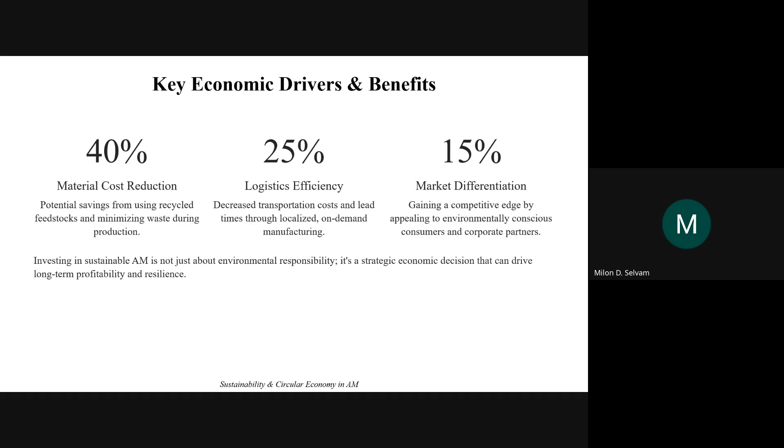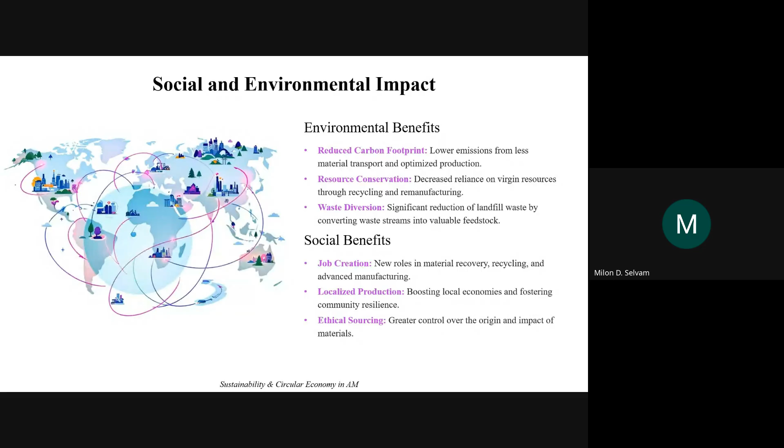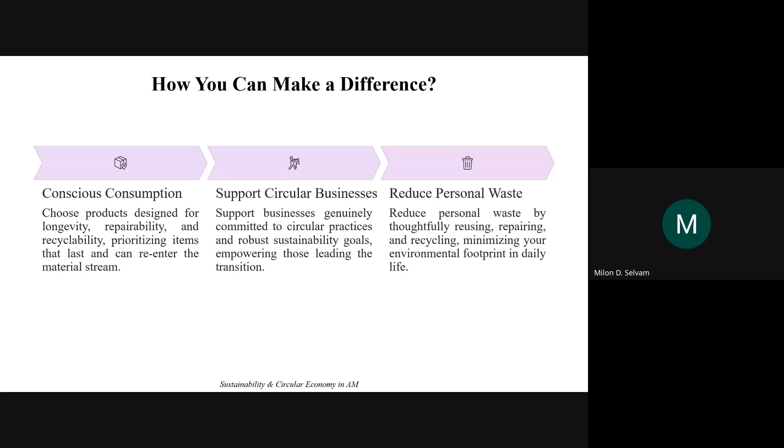Then supporting circular business models means supporting businesses genuinely committed to circular practices and with robust sustainability goals - those 17 SDGs - empowering those leading the transition. Then reduce personal waste through reusing, repairing, and recycling, which minimizes the environmental footprint in daily life.

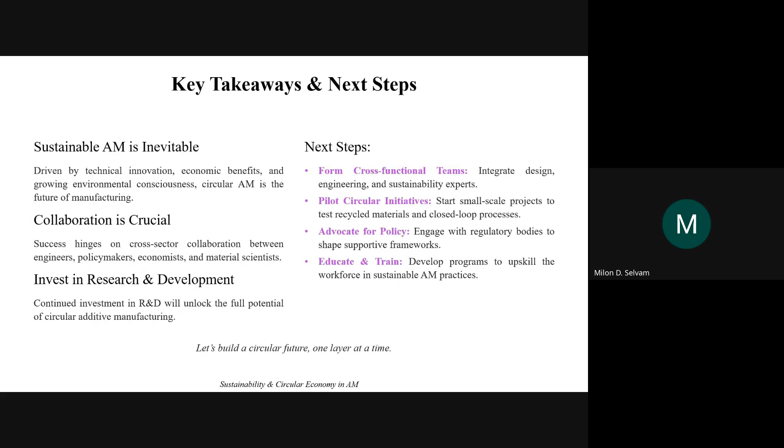So together, let's build a circular future, one layer at a time. The time to act is now. Sustainability and circular economy are not just ideals, they are essential for our collective survival and prosperity. Let's commit today to think circular, act sustainably, and inspire change in our communities. Thank you all. If there are any queries and questions, you can ask.

We shall discuss as much as I support. Again, I apologize for the external disturbances, and I don't know whether there is any network disruption from my side, but I know there are external noises. That's because there is an event going on parallelly in my school, in my department.

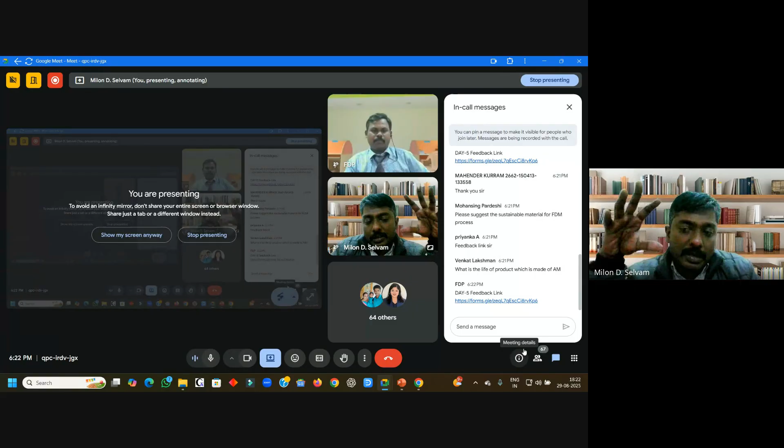In my presentation, I have suggested some materials, and even the life of a product through life cycle assessment. The second question is about life cycle assessment of the raw material, that is material for AM processes, and life cycle is always a research area. It is always a research area, and obviously you can find scholarly publications for recent researchers and recent materials in that.

Anyhow, I will share my presentation as well. It has a general overview on life cycle assessment and even the materials. You can go through that, and read more from scholarly publications.